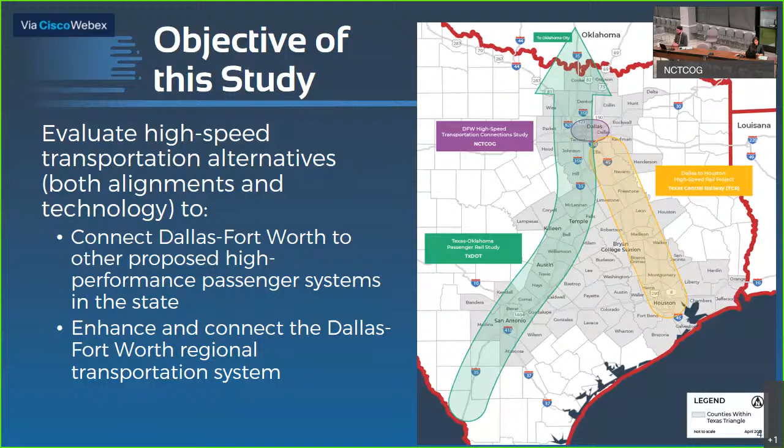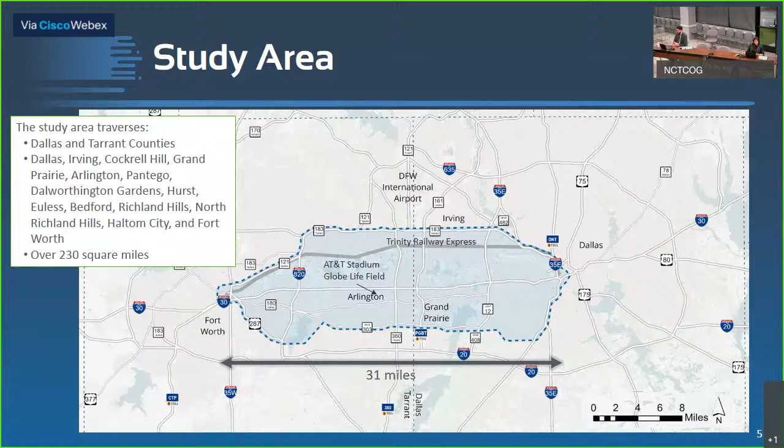The stated objectives will be analyzed in the study area as shown in this map. This area is generally bounded by State Highway 121 and State Highway 183 to the north, Interstate Highway 35E to the east, downtown Fort Worth to the west, and US Highway 287 and State Highway 303 to the south.

The Dallas-Fort Worth High-Speed Transportation Connections Study is divided into two phases. We are currently in phase one, the purpose of which is to analyze all reasonable alternatives regarding alignment and travel technology. This first phase has also included research on existing and emerging high-speed transportation technologies. The second phase will advance recommendations from phase one through an engineering and environmental analysis as prescribed by the National Environmental Policy Act. The second phase will include conceptual and preliminary engineering tasks, as well as financial and project management plans, concluding with a decision by the federal government regarding project next steps.

Of the initial 43 alignments and 5 technologies evaluated in level 1, 23 alignments and 4 technologies proceeded to the second level of evaluation. Level 2 screening focused on identifying any major flaws which may preclude the alternative from being built. Of these alternatives, 10 alignments and 3 technologies advanced to level 3, which involves a more detailed evaluation. The project team is currently completing this step, and we need your help.

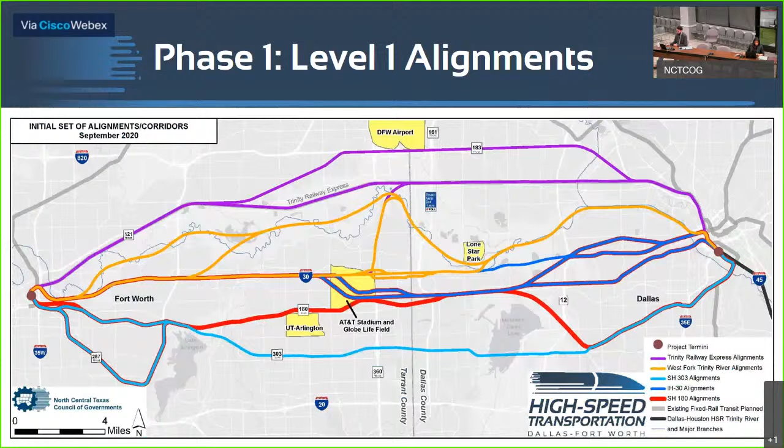The Trinity River alignments in gold, the Interstate 30 alignments in dark blue, the State Highway 180 alignments, which are very near the existing Union Pacific Railroad alignment, in red, and the State Highway 303 alignments in light blue.

After the major flaw evaluation of alignments in level 2, as well as consideration of stakeholder and public input, 10 alignments were advanced into the third level of screening as shown on this map.

In this final level of screening, the project team performed a more detailed evaluation. Later in the presentation, we will share the detailed criteria used to screen these alternatives, along with the draft recommendations resulting from this analysis. I'll pause a moment for you to view this map.

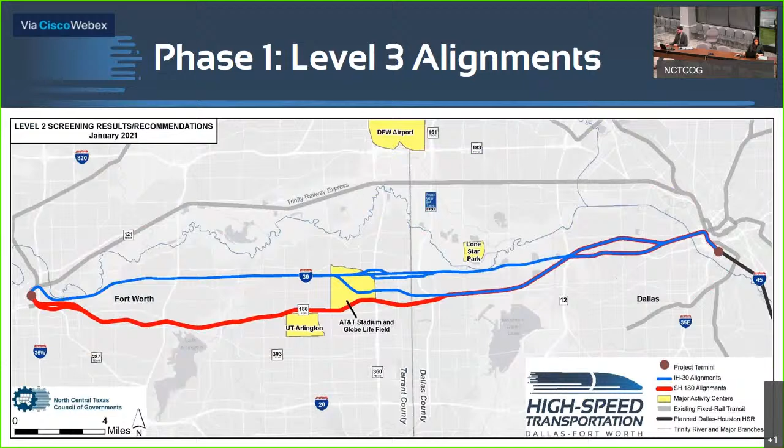High-speed rail trains, which are the passenger trains proposed for the Dallas to Houston system, magnetic levitation, or maglev for short, train technology, and Hyperloop technology, which incorporates a passenger or cargo pod moving in a near vacuum tube. In addition, the project team considered other emerging high-speed transportation technologies.

Conventional passenger rail was eliminated in level 1 screening, and higher speed trains, along with other emerging high-speed technologies, did not advance beyond level 2.

Only high-speed rail, maglev, and Hyperloop technologies advanced to the third level of screening evaluation. We will share our draft recommendations on this travel technology later in this presentation.

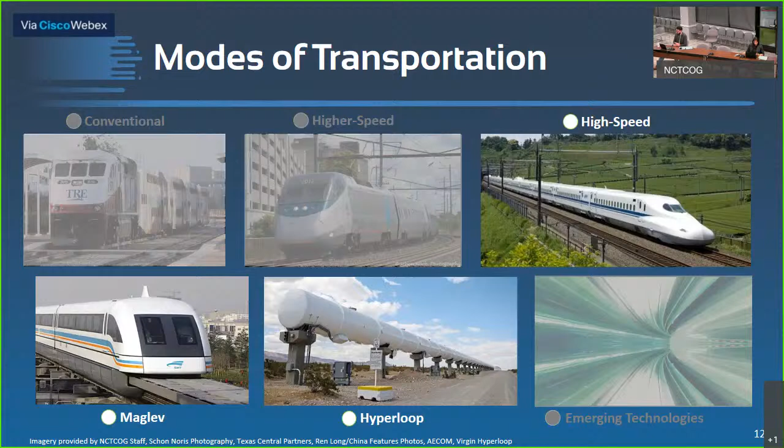Throughout the Dallas-Fort Worth High-Speed Transportation Connections Study, there are many opportunities for the public and governmental agencies to review, comment, and participate in this study.

There are various types of public and agency engagement strategies used in this study. To date, the project team has held well over 90 meetings and briefings with various partners, stakeholders, international technology experts, and interested parties.

2 series of public meetings have been held for this study, the first series being in September of 2020 and the second series in January 2021.

Responses to questions and comments from previous public meetings, as well as responses to frequently asked questions, are available on the study website at nctcog.org/DFW-HSTCS. Our engagement strategies have also included meetings with elected officials in the region.

So far, 3 elected official meetings have been held, and on a monthly basis, the project team meets with the Federal Transit Administration and the Federal Railroad Administration to discuss the study progress.

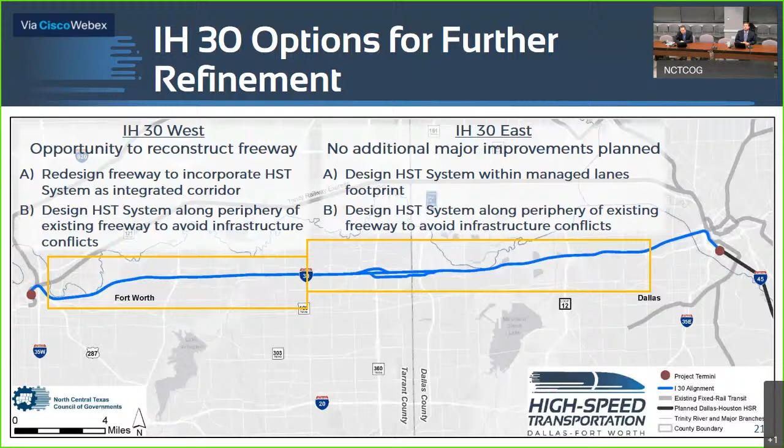We continue to work closely with the Texas Department of Transportation to refine the preliminary alignment concepts prior to starting the next level of preliminary design in Phase 2.

To supplement the Level 3 alignment screening evaluation, the project team began looking at how each of these alignments could connect to the urban areas of downtown Fort Worth and downtown Dallas. These urban center connection concepts were developed independent of the Level 3 alignments because of the complex nature of dense existing and planned infrastructure surrounding each downtown station.

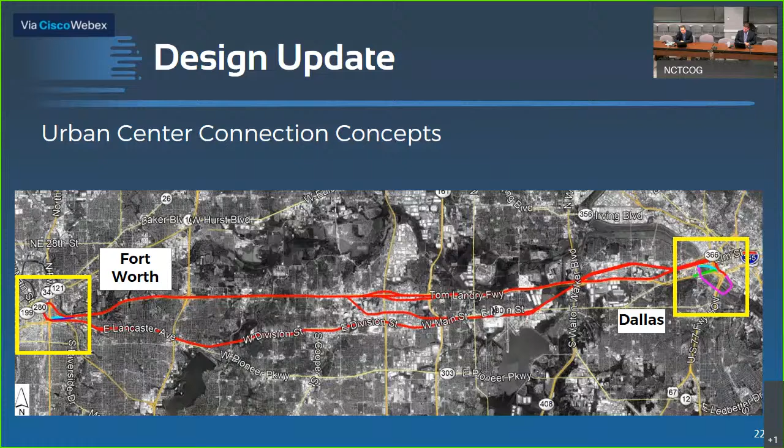As stated previously, the urban center connection concepts are independent of the alignment alternatives and can be adjusted to facilitate connection to any of the Level 3 alternatives that are recommended for advancement into Phase 2. We are seeking feedback on other ideas on ways to connect to the urban centers. Please share your thoughts with us.

The project team has developed a list of pros and cons for the current connection options, which will be further defined during the next phase.

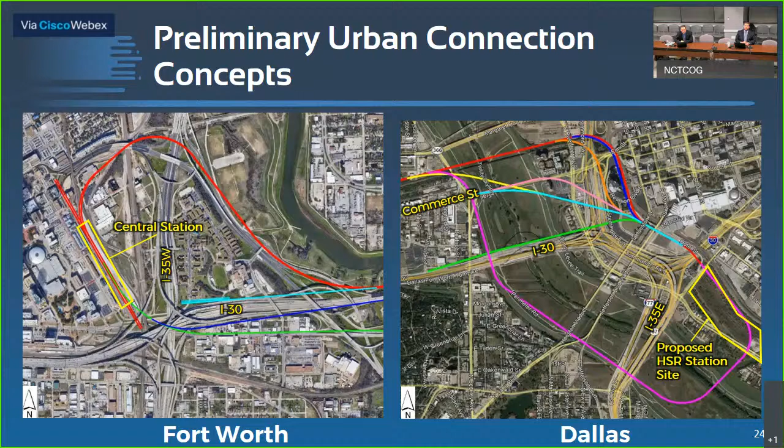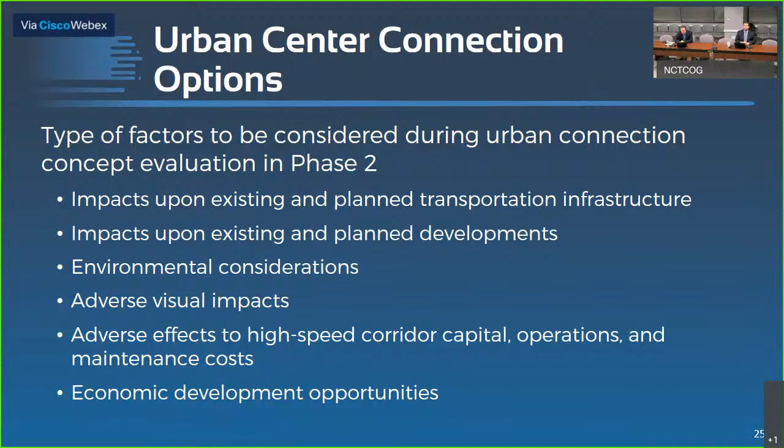In phase 2, the project team will evaluate the effects of these urban center connection options on existing and planned infrastructure and developments. We will also be looking at environmental considerations, including visual and noise impacts, as well as effects on project costs. Economic development opportunities around high-speed transportation stations will also be considered.

The stations anticipated for this high-speed system are not the same as the canopy and platform footprints of passenger rail systems that we're familiar with locally. High-speed transportation stations are typically larger structures that serve a regional multimodal transportation hub for passengers from large population centers, similar to a regional airport.

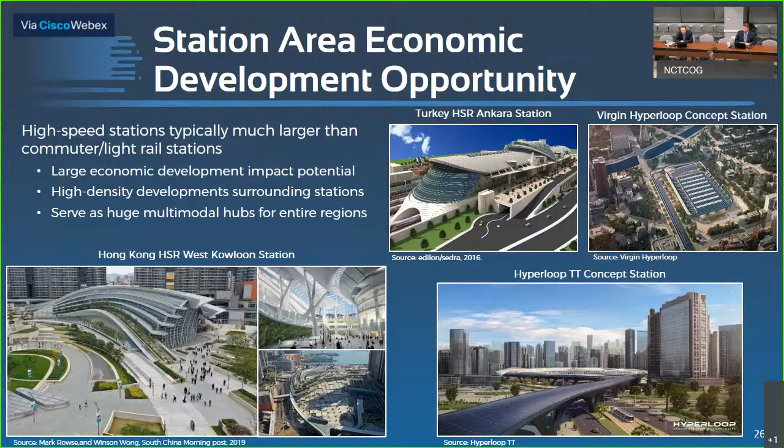The current concept for the DFW high-speed transportation connections project includes 3 stations: 2 at each terminus, one in Dallas and one in Fort Worth, and the other in the vicinity of the corridor midpoint.

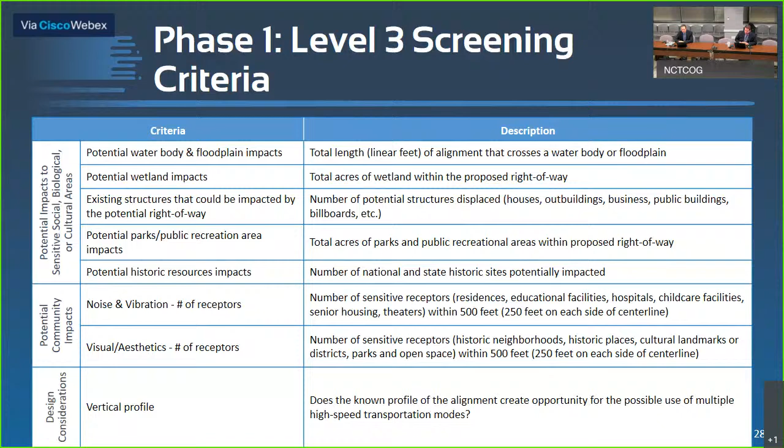The final three major criteria considered in level 3 are constructability, cost, and operations. Constructability or operability were separated into 8 different categories, including the need for additional right-of-way, impact to transportation systems, either positive or negative, technology maturity, and impacts during construction.

The project team developed order of magnitude construction costs for this project for the purposes of comparing alternatives. Operations were also divided into categories.

These categories included total travel time along with capability of technologies to accommodate steep grades and sharp curves, which gives flexibility in designing the system. Each category was assessed for the remaining alternatives. I'll pause again for you to review the criteria and descriptions.

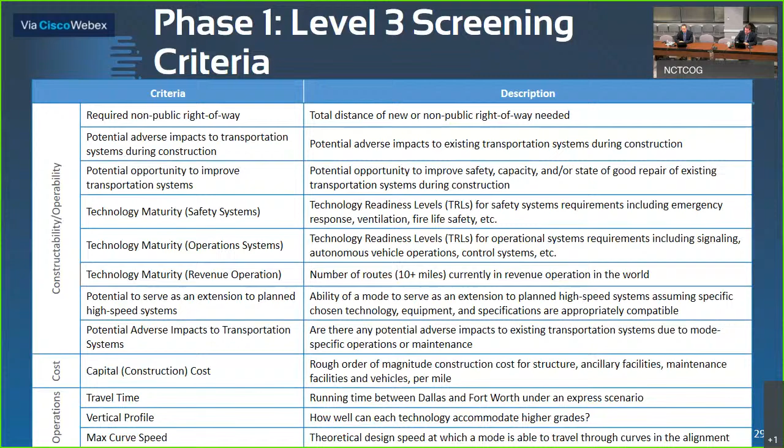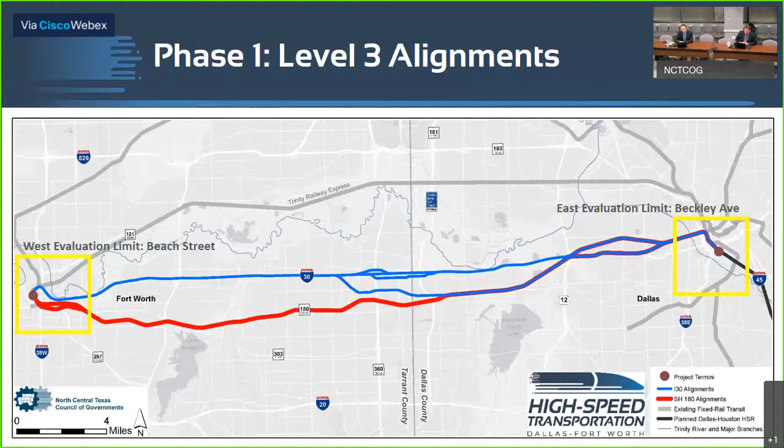Based on the level 3 screening ratings for each alignment alternative, the 3 highest ranked alignments were along the Interstate Highway 30 corridor. These alignments had the fewest impacts to structures and parks, the lowest potential for noise and vibration impacts, and the least potential adverse impacts to existing transportation infrastructure.

Because these alignments hugged or could be within the interstate highway for most of the distance between the two downtowns, they potentially required the least amount of additional right-of-way. With these results, the project team is recommending these Interstate Highway 30 alignments advance into phase 2 of the study.

At this point, the alignments diverge to find different ways to navigate past the highway interchanges of State Highway 360 and the President George Bush Turnpike. All 3 alignments converge once again in Grand Prairie, heading east along Interstate Highway 30 into the city of Dallas.

The alignments leave the Interstate Highway corridor near Northampton Road to follow a path similar to the Union Pacific Railroad alignment as it approaches the Trinity River near Beckley Avenue. There's an opportunity for the alignment to be located on the north or south side of the Union Pacific Railroad in this location. I'll pause for a moment for you to review these draft alignment recommendations.

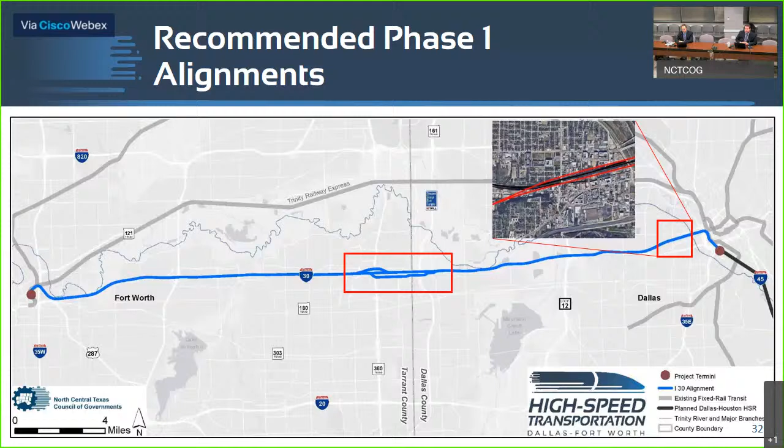For the transportation technologies or modes, the modes with the highest ratings were high-speed rail and Hyperloop. While high-speed rail ranked well across all technology maturity criteria, Hyperloop technology ranked well in the operational criteria, including fastest travel time. Of the 3 modes considered in this final screening level, maglev had the lowest ranking, due in part to its high construction costs compared to the other 2 technologies.

Based on these results, the project team is recommending both high-speed rail and Hyperloop advance into phase 2. The next 3 slides provide further reasoning to include both high-speed rail and Hyperloop in the second phase of this study.

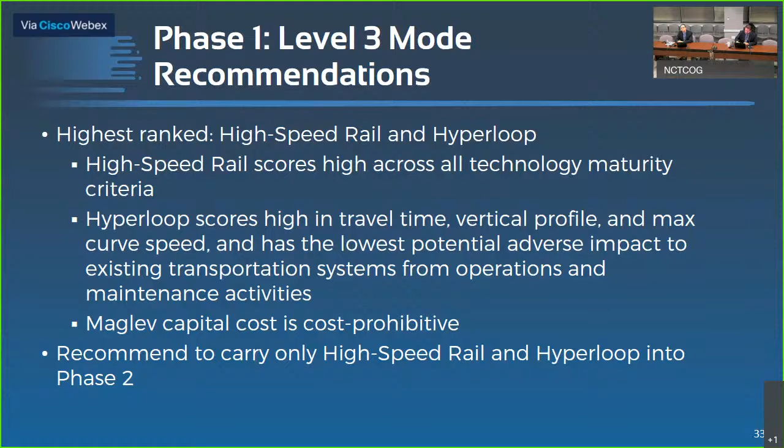The project team applied the Technology Readiness Levels, or TRL, evaluation standards from NASA to compare technologies and determine their relative maturity. This provides a basis to compare emerging technologies such as Hyperloop with proven technologies such as high-speed rail, which has been in operation for over 50 years in other parts of the world.

The project team determined that Hyperloop technology is still in the developmental stage at a TRL of 6, with high-speed rail having several thousands of miles of track being at a TRL of 9 in the implementation category.

As Hyperloop technology is advancing rapidly, the project team is recommending to advance both the proven technology of high-speed rail and the evolving Hyperloop technology into phase 2. This creates the opportunity for Hyperloop technology to continue to develop over the next 2 years of this study. This project will benefit from having either technology as an option once phase 2 is complete.

Should Hyperloop technology not develop as quickly as expected, high-speed rail will still be a viable technology for the corridor. Based on current information, the construction costs for both technologies are similar.

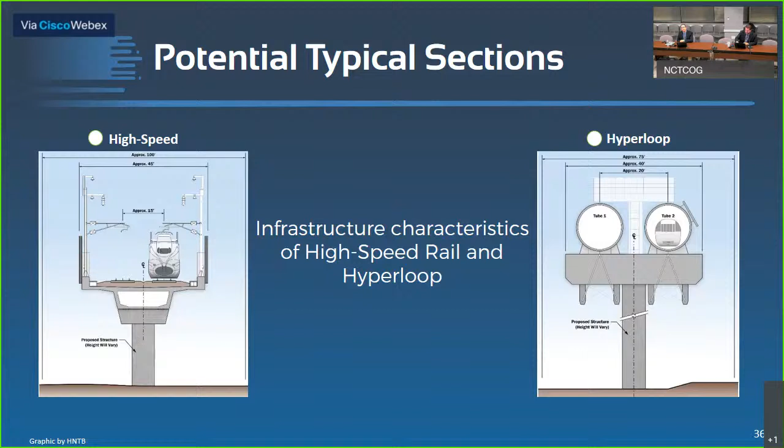Now that you've seen the evaluation process and phase 1 draft recommendations, we would like to walk you through the next steps of this study.

As Rebecca mentioned, we will accept public comments on the phase 1 draft recommendations through June 18th of 2021. The project team will continue coordinating with the Federal Transit Administration, Federal Railroad Administration, cities, transportation providers, and federal and state resource agencies. On July 8th, 2021, the project team anticipates requesting approval of the phase 1 recommendations by the Regional Transportation Council, pending input from the public and local stakeholders.

Please be sure to contact us if you would like a presentation of this high-speed transportation connection study to your group or organization. We are targeting our outreach to community groups and the remaining level 3 screening alignment corridors. We also plan to hold in-person events this summer as safety protocols allow. Please stay tuned as details are finalized.

In late summer or early fall of this year, we anticipate initiating phase 2 activities. During this phase, the environmental analysis and documentation will be conducted in accordance with the National Environmental Policy Act. While continuing public and stakeholder outreach and engagement throughout phase 2, the project team will also be developing preliminary engineering as well as financial and project management plans.